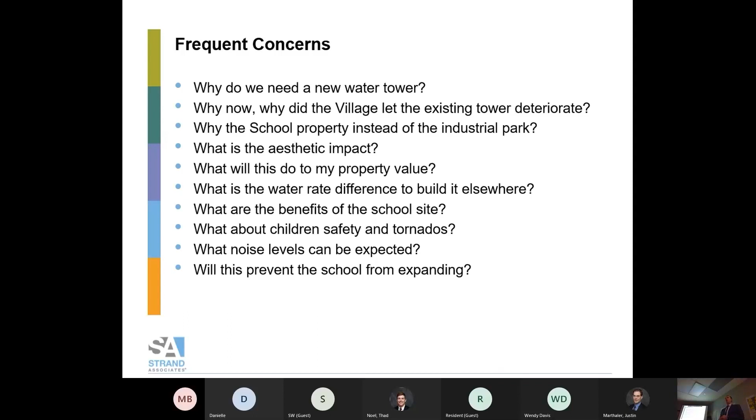First, why does the village need a new water tower? As most folks know from seeing the existing water tower, that needs repair. That's one side of it. Another side is that the village's water supply system needs additional fire flow capacity available to it.

I make reference throughout the presentation to ISO, the Insurance Services Office, an organization that goes to communities across the nation, shows up, tests fire hydrants, and reviews water infrastructure to see what the water mains, pumps, and towers are capable of doing as far as fire flow goes. They also look at building occupancy type and construction type to target how much fire protection is needed at a location, then do flow tests to see how much is available.

They come through about every 10 years. The last time they came through the village of Bristol was 2018, and they determined there are a handful of sites here in the main part of the village, utility district number 1, that need a fire flow rate of 3,500 gallons per minute for a total of 3 hours.

The existing water tower is 100,000 gallons, and if you do the math, it cannot support that. Looking at a 3-hour duration, the existing tower could support 550 gallons a minute. If you try to deliver that target flow rate of 3,500 gallons per minute, it could do that for a total of 25 minutes before going empty. With the wells running, it could do that for 40 minutes. So that is a deficiency.

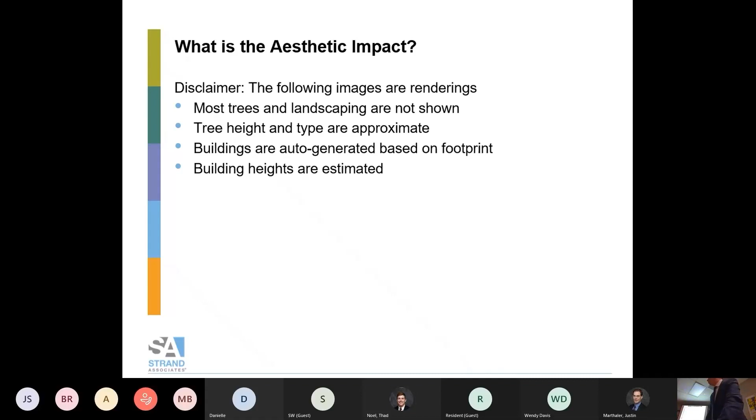Trees and landscaping are manually added, so we didn't go through the effort of adding all of them—tree height and type are approximate. Buildings are auto-generated based on the footprint of a house, and the heights are also estimated. So if we have not rendered your particular property correctly, please know it was just to provide a general visualization of what this might look like.

On your way in tonight, behind where the agendas were located, there's this same index map, and we're going to walk through over a dozen of these locations so you can see where they're at. There's a little red arrow in the corner, same with the printouts, so you can see where we're at and the perspective we're looking from.

In this first one, it's in the school parking lot on the south side of the school—that's what the water tower would look like.

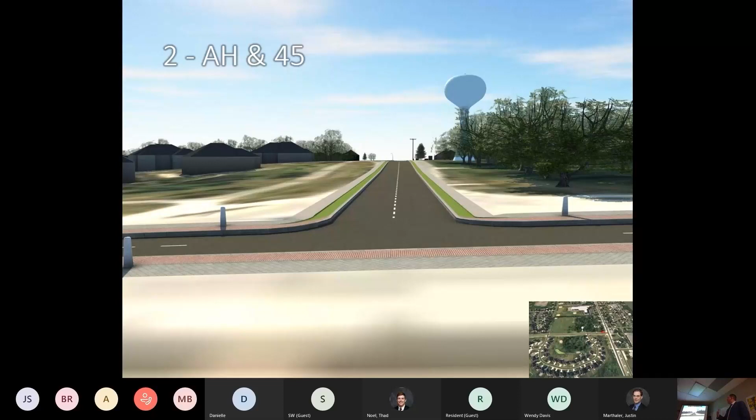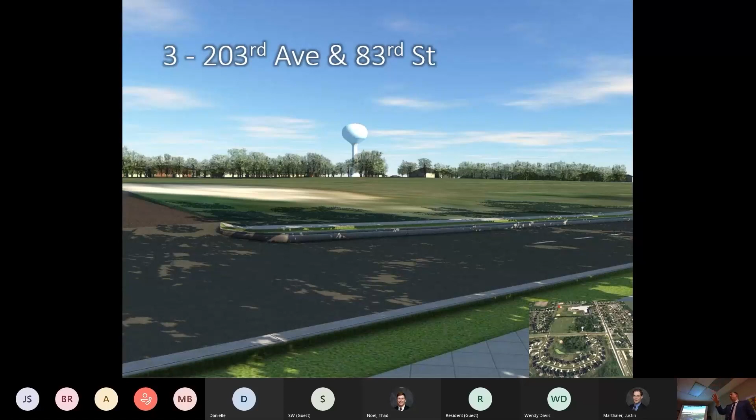Number two is on US 45, looking west down AH. Chaucer Woods is on the left, and the school property is on the right. I'll reiterate, every one of these is on the boards in the back if you want to take a closer look at a location nearest you—feel free to take a look.

This is kind of midway up the block, actually on the southwest end of these ball diamonds, halfway up 203rd between AH and 83rd, looking back southeast toward the water tower.

This is property on 45. The approximate address is shown, whose backyard backs up to some wetlands and woods, and then the water tower behind that. This perspective is from their driveway that leads to the garage in the back of the house.

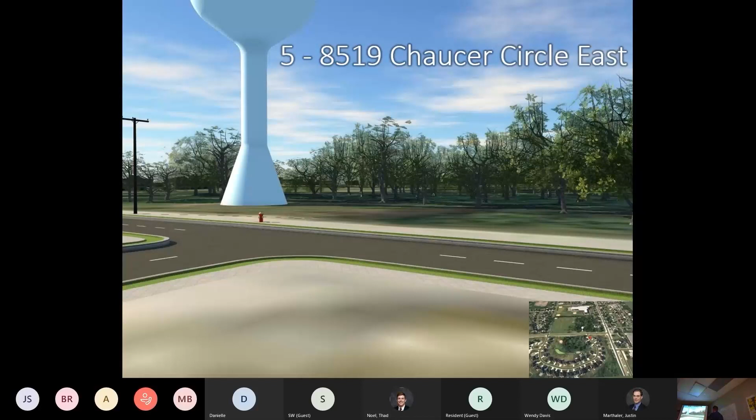Next up, we're at the east entrance of Chaucer Woods—at that intersection, the westernmost house, looking back toward the water tower.

Next one is across the street to the west. This perspective is kind of on the side of the house, so if there's any windows on the side and you were looking out, this is what you would see. I'm not sure what type of landscaping is there, so I apologize, but I just wanted to give a perspective of what the water tower itself might look like.

We're moving now. If you came into Chaucer Woods East and started to head south, making your way around the horseshoe, this is about 3 houses in on the east side of the road. This is kind of like a front stoop perspective if you were looking back toward the water tower.

Same view, a couple more houses down. The reason I wanted to pick out these views in particular is that as you turn around the horseshoe, you're going to lose vision of the water tower. So I want to give an idea for the folks who will have the most direct view of it.

This is about midway through the horseshoe, actually in the backyard of a house, so it would be on the north side of Chaucer Circle. Not all trees are shown, and you can see that distorted aerial image in the foreground, but this is kind of a backyard perspective of what this would look like. That would be typical for all the properties on the north side of the horseshoe.

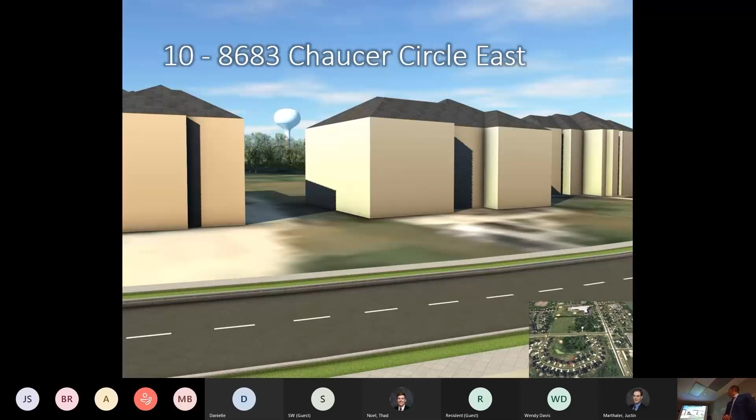We're still at the midpoint in the horseshoe, but kind of in the front yard across the street. These building heights are approximate, probably not quite that tall, but the point is you'll see the water tower between the houses, though if a house is blocking your particular view, you might not see it.

As we continue to move around the horn, we're getting toward the west side of the circle here. The point is that the water tower is getting further and further off on the horizon, and depending on your perspective you may see it around or behind some of the houses, or in some cases not see it much at all.

This is kind of in Chaucer Place. Again, I know that's not representative of the actual landscaping there, but you can get a feel for what that would look like.

This is a house on Chaucer Place, toward the west intersection, or Chaucer Circle West intersection with AH, so you could see what the water tower would look like if you used that entrance to the subdivision. Next up is the intersection of 203rd and AH, looking back east.

The next several pictures are intended to give a perspective of what the water tower impact would be to those in the Bristol Woods subdivision.

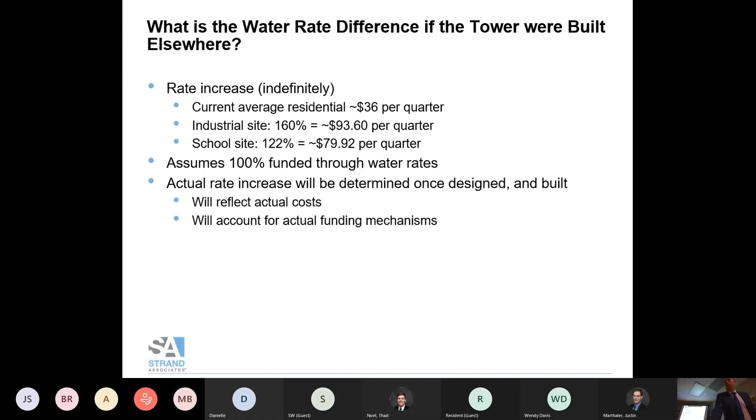Once the project is completed, the PSC will make the village go through the full-blown audited calculations. They'll account for all the actual funding mechanisms to determine what the water rate increase will be, but you can get an idea for the order of magnitude difference between the two sites.

What are some of the other benefits of the school site? The school is a customer of the Bristol water utility, and their fire flow capacity is below ISO target levels. That's the problem here. That gets solved for the school in part by siting the water tower on that property.

The school site utilizes the benefit of past investment in large diameter mains. What I mean is the village already started building this backbone of 16-inch diameter mains. Putting the water tower on that backbone just makes good use of that past investment.

Siting the tower at the school saves the utility and the school money. Using those existing mains expands mains further to the school as part of the project cost, rather than having the school take that on as a special assessment or some other charge, and it keeps the water rate increase lower. Now, there's going to be a significant rate increase as a result of this project, but this controls it a little bit.

Another question that came up is, won't a sprinkler system at the school take care of the fire protection problem? One issue is that building sprinkler systems are usually fed with a private lateral that's 4 inches in diameter, some cases 6 inches, and there's only a 6-inch pipe available to the school right now. Tapping a 4 or 6-inch pipe off of a 6-inch water main, there's just not as much volume and pressure available to that private fire lateral to serve the sprinkler system. Particularly if there's a fire at the school, the sprinkler system and the fire department are going to be competing for that same water out of that 6-inch main.

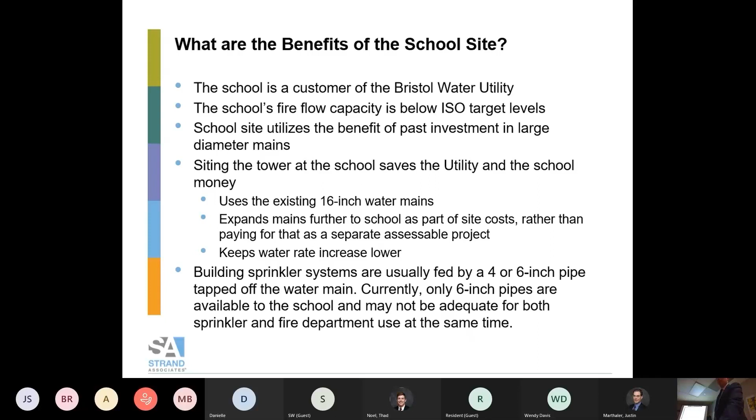I have no idea what flow rate the sprinkler system is designed for, but let's say the fire department already wants 3,500 gallons per minute to fight the fire, and there's only 1,900 gallons per minute available, and only at 20 PSI under worst case scenario. If the sprinkler system needs a few hundred gallons per minute of that, then that's even less available to the fire department to fight the fire. So having a large diameter main there helps out both the fire department and the sprinkler system.

There are a couple questions about child safety, tornadoes, earthquakes, and water towers. The pictures on the right simply demonstrate that in a couple of very large tornadoes that have happened regionally, it's very common that the water tower, especially a single pedestal tower like the kind proposed here, is one of the only structures left standing. So there's a lot of safety factor built into all the structural and foundation designs of the tower.

The water tower itself has no moving parts. It literally has a 12-inch water main that goes 100 feet up in the air to the big ball where the water is stored, and it's the well pumps off-site that control the level in that water tower. So there's no pumps or moving parts here, and no associated noise.

Any ladders with this type are all internal. That big diameter pedestal is part of the structure; it doesn't actually hold water. Inside that pedestal, there are ladders, platforms, and a 12-inch pipe that takes the water up to the ball. The only way to access those ladders is through a steel door on the outside of the bottom of that pedestal, which is under lock and key, and also has an alarm tied back into a central computer monitoring system.

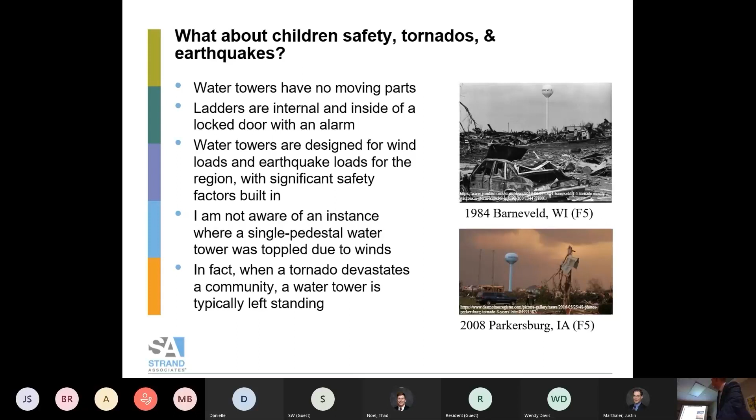Fire protection is the real safety issue. ISO indicates the school should have 5,000 gallons per minute for 3 hours available. We're targeting 3,500 gallons per minute or more for 3 hours. The existing 6-inch mains on the north side of the school only supply 1,900 gallons per minute when system pressure is allowed to drop to the DNR minimum of 20 PSI. The sprinkler system and fire department will be competing for the same limited water supply.

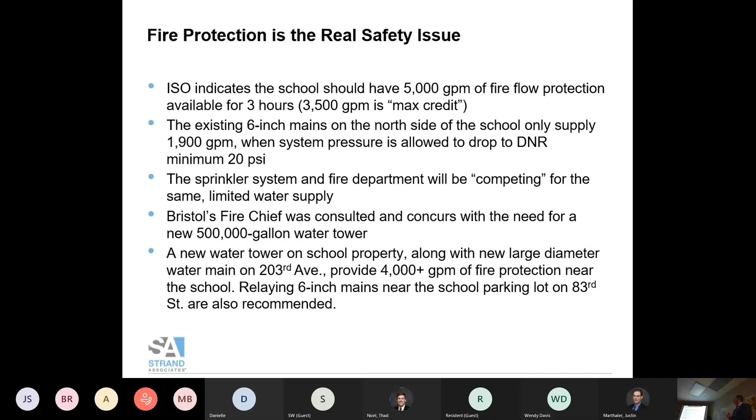Bristol's fire chief was consulted and concurs with the need for the new 500,000 gallon water tower. A new water tower on school property, along with a new large diameter water main on 203rd Avenue, provides over 4,000 gallons per minute of fire protection to the school. Relaying 6-inch water mains near the school parking lot on 83rd Street is also recommended.

What noise levels can be expected? Again, the water tower contains no pumps or moving parts. The site will be quiet like any other water tower except for initial construction, which will be rather disruptive with cranes, excavation, and foundation systems that are usually commonly 25 or more feet deep.

Water towers these days get repainted approximately every 20 to 25 years, and that's about a 2.5 to 3 month process. So those are the times that the site will be noisy, but in between, under normal operation, it'll be a pretty calm, quiet site.

Will this prevent the school from expanding? Just in full disclosure, I've not talked directly with the school at all about this. We've kind of been relying on the village to be an intermediary there. So I have no knowledge of their plans for expansion, but I laid out a couple quick graphics here to give a perspective of what might be possible.

The image in the upper left here is the same rendering that's on the index page back there, and it gives the intent that the site for the water tower is tucked away literally in a corner that's bounded on both the north and the east by wetlands, which can't be disturbed anyways as part of construction. If you look at the image in the lower left, you can see a square - that's the parcel that the village is pursuing to acquire from the school district.

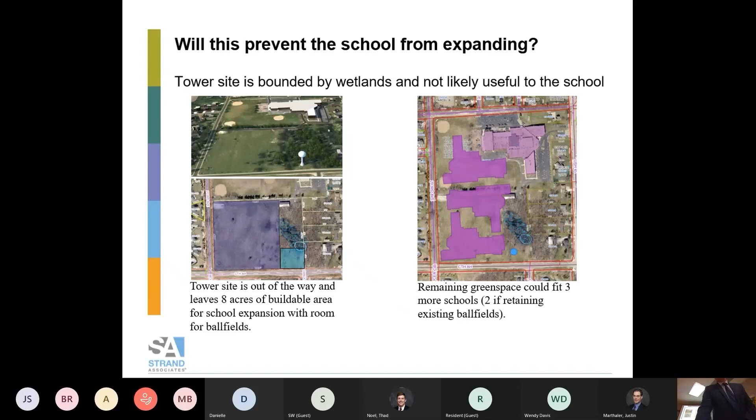You said that around the school, like on 203rd and 83rd Street, that would be like $250,000 now. Is that for each street, or is that total for the whole thing? Yep, great question, and I'll go back to that slide.

Is that the one the school would have to pay just the 250,000? Yeah, and to be honest with you, the need for that one just came to light probably a month ago, as we were studying this particular site more and more.

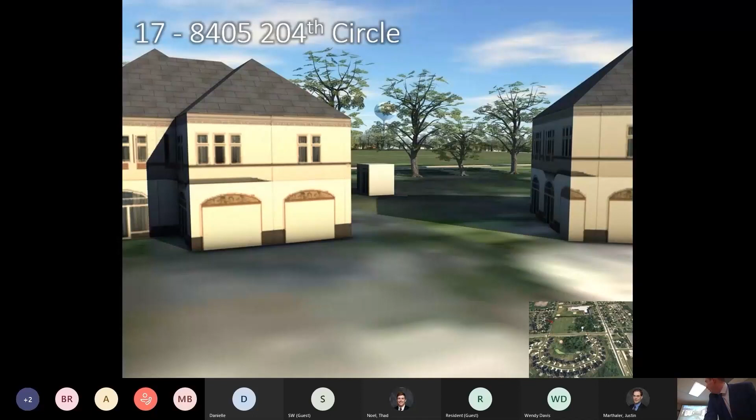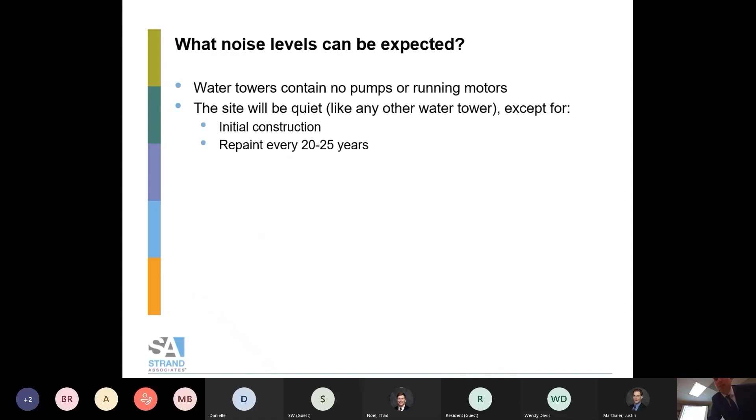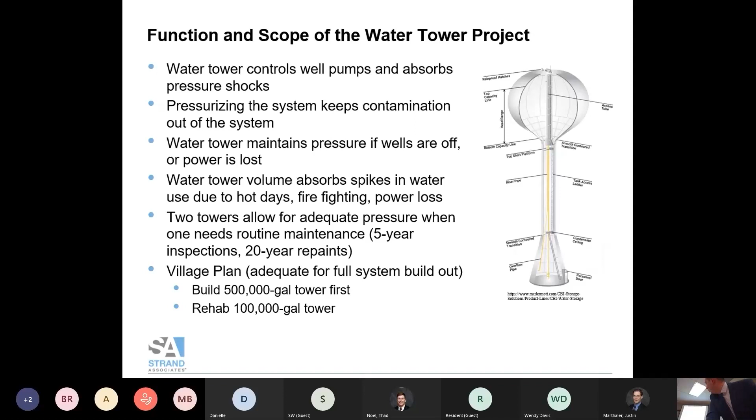So with that kind of cost, why aren't we looking at federal or state grants to help pay for the cost instead of passing it all off to the residents in the village in this area? Those are options, but we've got to pick a site first and know what costs we're going after. Through the state, DNR has an environmental loan fund, a state revolving loan fund they call the Safe Drinking Water Loan. The village does intend to apply for that, they're working with their municipal finance advisor, Ehlers. And that's all under the regulation of PSC, so they will definitely be pursuing those. It's a matter of picking a site so we know which cost to go after funding for.

I can tell you right now, I'm not interested in being the highest one in the state of Wisconsin. Oh, sure. Just because it's a nice thing to have, and I feel that there's other options. Being a contractor, historically there are ways of cutting costs for the residents of Bristol and not having to pay $50 to $60 more than we currently pay per quarter.

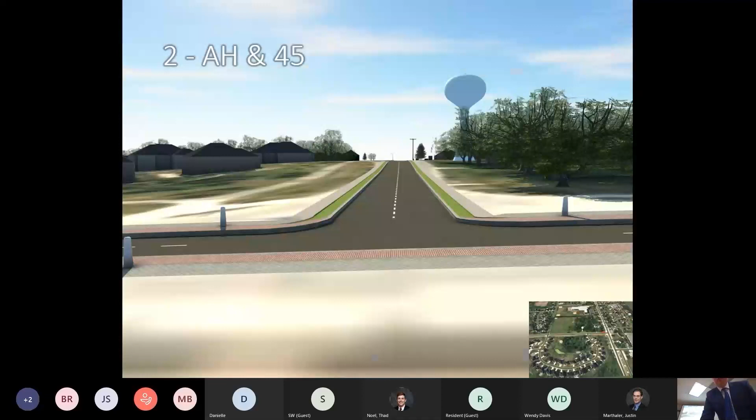Yeah, so I'll get back into that. I apologize, I wish I memorized which side of all these renderings that was on. I think it was prior. And I'll just note there are 3 questions here in the chat, we see those and we'll get to those.

All right, so the 2 images here kind of best speak to what you talk about. It might be hard for some in the audience to see, but there's a couple of red question marks around here. To be completely honest, when we see a school like this, usually there's, whether it's public or private, a water main that loops all around the school. Very common for larger churches and certainly required for commercial and industrial developments. You actually put a loop in all around the school.

So the thing is, the school could put some loops in right now, but absent of doing this water main on 203rd, there's nothing to really supply those mains. It would get better, but probably not to that 4,000 gallon plus kind of neighborhood. So if that's up to the school, if they want more hydrants on their property to surround the building where they could fight a fire from multiple angles, that would kind of be up to them.

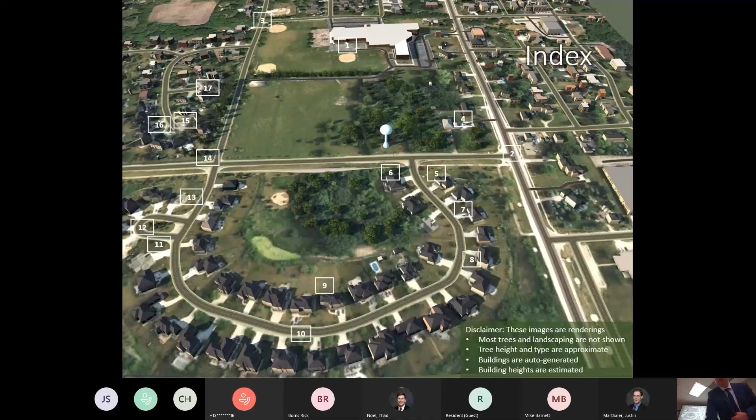Excuse me, Lauren Zimmer, 8232 203rd. I think it's like the second picture, that view, the view from my house. I didn't actually plan on speaking tonight because I was at the school board meeting that Randy presented this at, so I do know that as it currently sits, it's in the school board's hands as far as the site being voted on. If you go back again, yep, that's it. Okay, so my driveway is like two over from that. But if you could go a little earlier in the presentation.

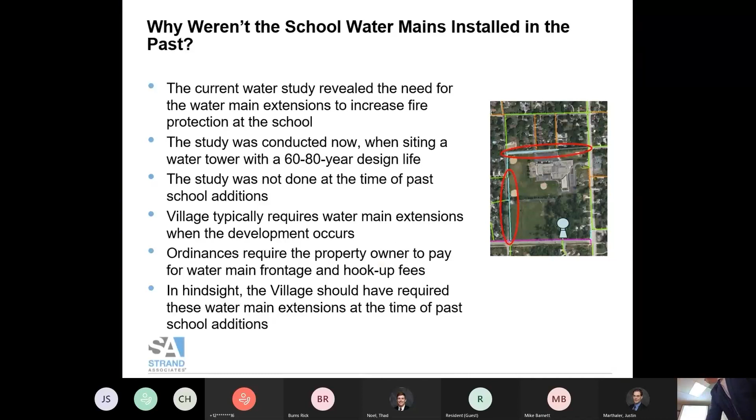As far as the fire protection, I heard it addressed several times regarding the school's fire protection, but I think there's maybe one more. When I look at that, I'm missing it. It's the one where you're talking about how much firepower we have. Could you elaborate on, if my home catches on fire with how this currently sits, because for that particular PSI, as I read it, as somebody who doesn't know anything about this, it looks like they can fight my house's fire for 25 minutes. Is that correct?

It's not correct. So, okay. But you ask a very reasonable question, and sometimes these things get lost on me because I'm so close to it. This is kind of like my daily life, right?

They rate these things based on the building and occupancy, structure type and occupancy. So it's much higher for a school than a residential home. For a residential area, it's probably between 1,000 and 1,500 gallons per minute, for a duration of 2 hours. So even though I don't have this calculation here, we could take 100,000 gallons divided by 120 minutes if someone wanted to do that.

But I can tell you right out of the gate that even with the village's largest well out of service, there's still about 880 gallons per minute that the remaining 2 wells can put into the system at the same time. And then you would have another, ironically, probably about 830 gallons per minute that could come from the tower.

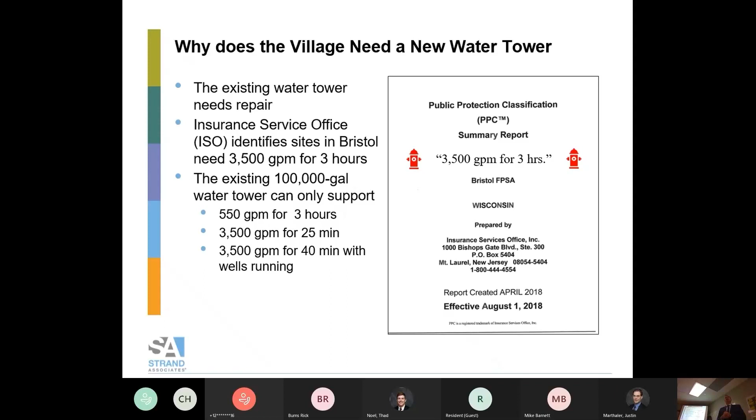Later on in the presentation, you said that there's potentially a second one that needs to happen? Yep, correct. Okay, so even say at this point, the school donates the land, the village absorbs that $250,000 cost. There still is a second one that would need to go in by the school, and the school has the option to upgrade or not upgrade—that lies within them.

Yeah, and just, you're on it, you're correct. I struggle to answer because we haven't gotten into those talks with the school board and the fire department to say... But upgrading that main, as somebody who lives right there, would be a benefit if there was a fire, because the fire department could tie into that?

So this extra water main provides little extra benefit to you. Where you're gonna get the benefit is if this water main doesn't exist—you get this missing link as part of the water tower project, right here. So instead of the water having to go around the system the long way to get to your house, through 8-inch mains, it goes straight up through 12-inch mains.